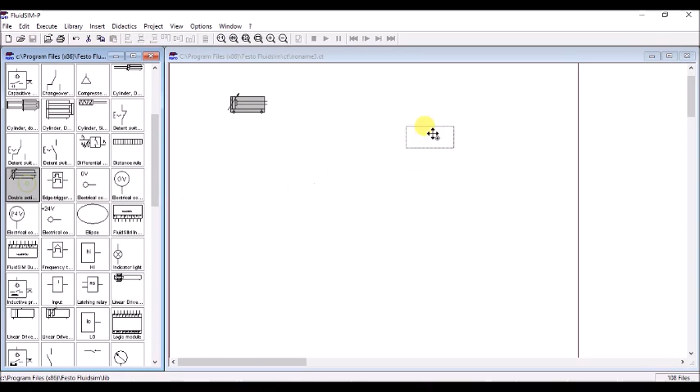For actuating I'll be using 5x2 valves, and here I'll be taking the help of double acting cylinders. I'll be taking two double acting cylinders. Let me take this as A and this as B, and for this I'll be naming it as A and B. For that I'll be requiring the text, and the sequence what I'm using is A plus, B plus, A minus and B minus.

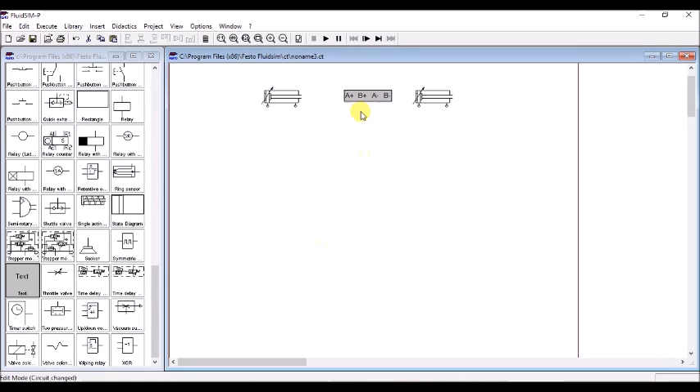This all with the help of electropneumatics. When I say electropneumatics, obviously I'll be having the instruments or else the equipments used as relay, limit switch and make switch, break switch and so on and so forth.

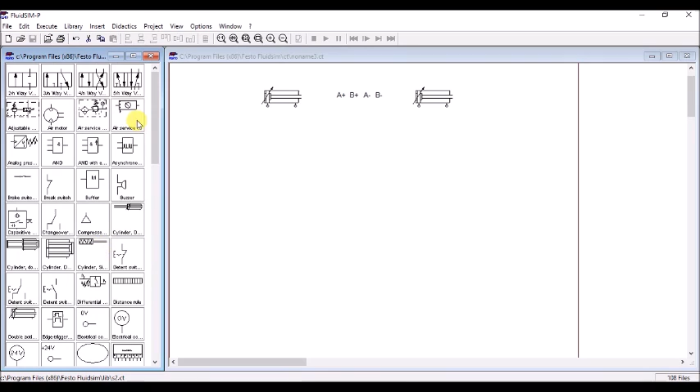And for this I'll be going for 5x2 direction control valve. One I'll be attaching here. Let me zoom a little bit. Yeah, I guess this is comfortable. Here, one here. 5x2 direction control valve, and this would be attached here. This would get attached here.

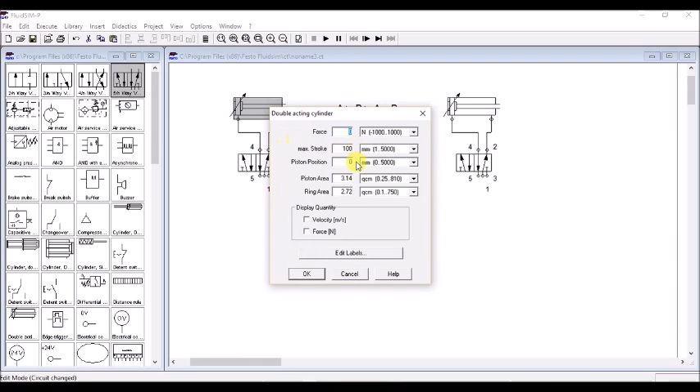A and B. As you know, I'll be just naming it as S1 0, S2 100, and same thing here, name it S3 as 0, S4 as 100, right? After that, as I said, this is electropneumatics.

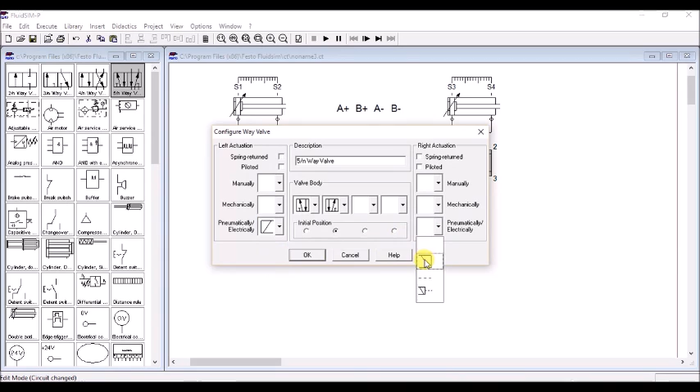This actuation will be not pneumatic, but it would be electrical, wherein these are called as solenoids. The symbol for this is a symbol for a solenoid, wherein this is being used for actuation of the DCVs, which are direction control valves. And let me name it as Y1,

this as Y2. Sometimes you may be expected to show the same on papers in your exams, so then also you can refer to this software so that you can analyze yourself whether you are doing it correct or not. So what I'll be needing is a compressor and a sucker also.

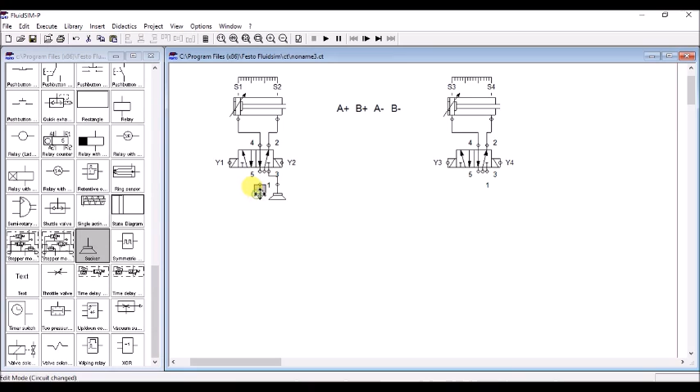Sucker would be here and compressor would be here, and again the same set will be present for this also. Yes, now what I'll do, I'll not zoom it now. Now I require a 24 volt supply and a 0 volt supply, wherein we are working on the electropneumatic circuits. 24 would be here, 0 would be here.

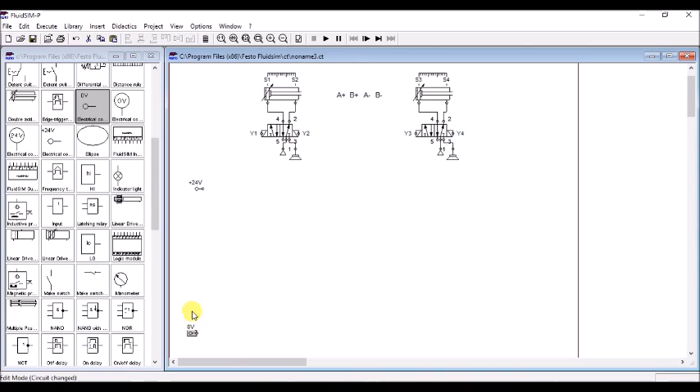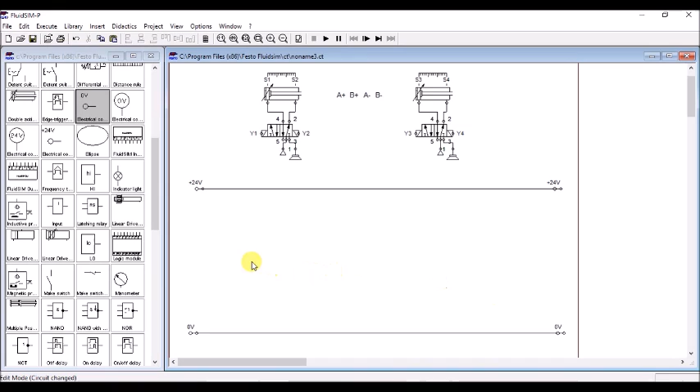But for my reference, what I'm doing is I'm just taking 24 here and 0 here. Afterwards I'll just remove it, because to draw a line I require this, nothing else. Then again I'll just join this like this. Okay, afterwards I'll be just removing it, or else I'll just remove it. I can remove it now also, yeah, afterwards also. Yeah, let us try to do this with the help of electropneumatics.

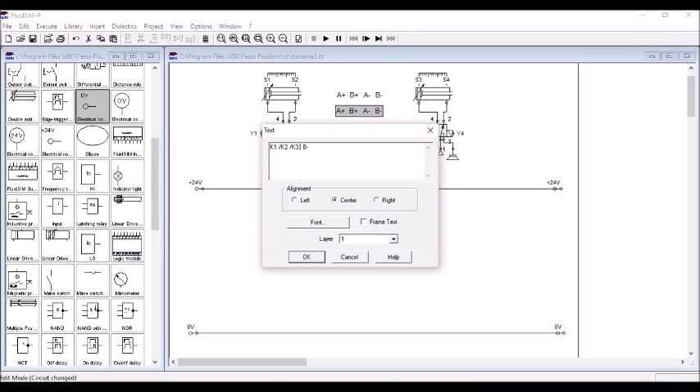Kindly make sure that for A plus I'll be using, I'm just writing here, K1. With the help of K1 relay I'll be achieving A plus. With the help of K2 relay I'll be achieving B plus. Then with the help of K3 I'll achieve A minus, and with the help of K4 I'll achieve B minus. Okay, this is for your reference, right? Let us start the same.

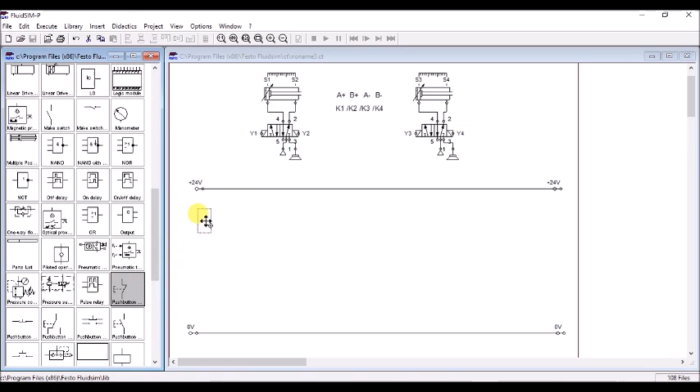Now what I'll do is I'll use the push button to start anything. Push button you can get from here. Here I have a push button, right? So I'll be using this push button over here. Yes, I have taken the switch button over here, or else a push button. Then what else I want? I want a limit switch, or else I could say make switch. I can convert it back to the limit switch.

I'll just double click this one, and there are three options over here. You can select a switch with roll, then it would be acting as a mechanical roll. What I said in the earlier videos, that whenever we are going for A plus B plus A minus B minus kind of circuits, the last position of each cylinder should be depicted in your diagram, or else the last position would be there in the first diagram of the circuit.

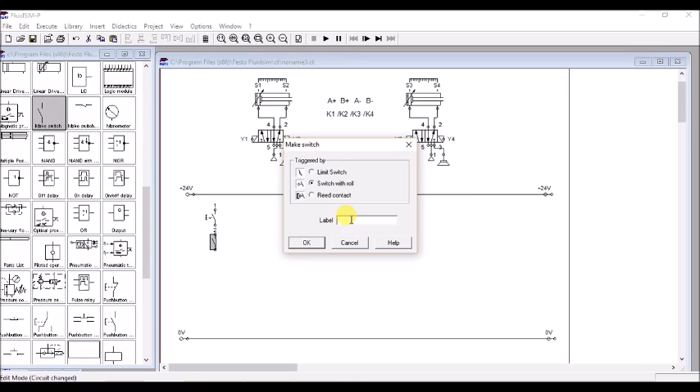So here I have B minus, which means after attaining B minus, or else the position S3, I can proceed for the next cycle. So here what I'll do, I'll say S3. So I can see S3. I'll just attach this also. I'll attach here also, right?

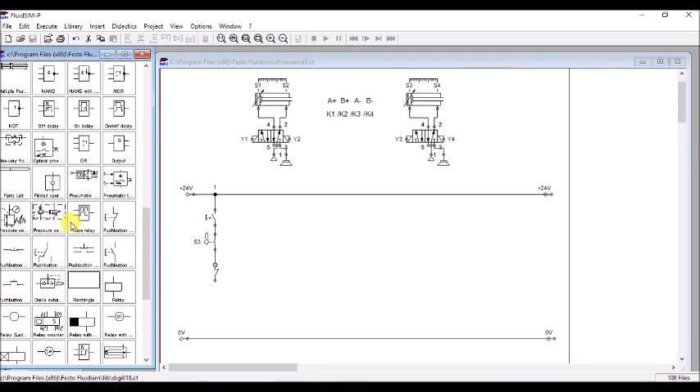After that, what I need is a break switch. Break switch is nothing but a normally closed switch, or else a break switch it is called as, and a relay. I want a relay.

Yes, for this I'll name it as K2, and I'll be requiring another make switch. From here let me take a make switch. I'll just use it here.

Kindly please keep in mind that this system is called latching. I'll explain once the whole circuit is built with animation. I'll explain why this latching is required. This is very important. We'll be naming it as K1, and again for this relay I'll name it as K1.

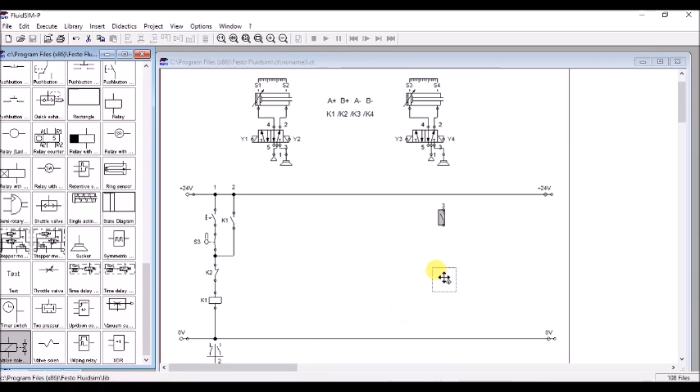Logic is very simple. Once this is made, half is my input, half is my output, like that I have made. So let me keep here a relay and a valve solenoid. Solenoid is that instrument or equipment in mechatronics which, if I'm naming it as Y1, would actuate this Y1 solenoid, right? Very simple. You can refer to my earlier videos. I have explained thoroughly what valve solenoids are.

I'll be naming it as K1, and I'll name this one as my Y1. So you can refer to a point that if K1 is true, that means this circuit is closed, Y1 would be actuated, wherein Y1 stands for A plus. Making sense? So like this, I'll just make a copy paste of it. In the book you have to write it again. There is no shortcut for that.

I'll just copy it and I'll paste it here, and let me keep it here, right? I'll attach this over here. Meanwhile, let me write this as K2. But kindly make sure, if K2 is present, K2 will give achievement in terms of B plus. B plus would be achieved when Y3 is present. So I'll just name this one as Y3. If K2 relay is made on, then my B plus should happen, right? Like that.

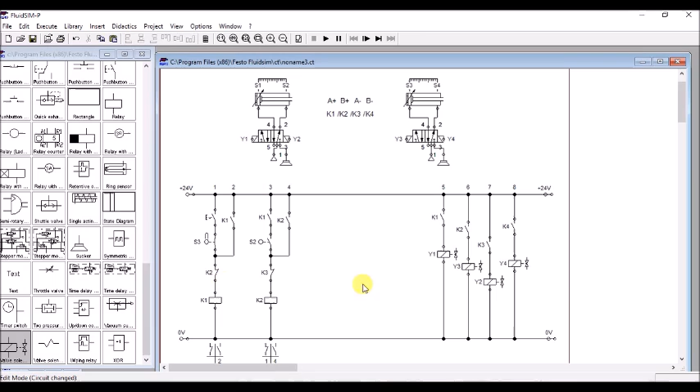So once the K1 relay is actuated, this K1 gets closed. Meanwhile this goes up, so the power supply comes from here to here because it's a push button switch, right? Meanwhile this is also closed, there is a power supply from here to here, but there is no power supply here because here I am changing this one to S2, right? Once K1 is closed, this is also closed. Once this is closed, power supply goes to Y1.

Y1 actuates, so obviously A plus will happen. A plus is true, then the S1 position has moved to S2, which means S2 becomes true. After that, as K1 is power supplied, power supply goes in here. So K2 actuates. Meantime, when K2 is actuated, we have a normally closed switch here. So, as the relay toggles the switches, this becomes a normally open switch.

So for this one, power supply goes off and only power will be present in this one. Meanwhile, power supply goes off for this and power supply would be present for only this. So every line, this line makes this off and moves further. That's why this relay is important to toggle this normally closed switch.

This is called latching, wherein power supply, once K1 is not true, obviously power supply would get cut. But as I have K2, this becomes normally closed and power supply would be parallelly coming from here to here. Making sense? Yes, we'll go a little bit further.

I'll take the help of copy and paste again. Now what's the scenario? I require this to be K3, right? This should be K2. This should be K3. This should be K4. And this one will be K3, right?

So what happens here? K1 has achieved S2, or else A plus. K2 has achieved B plus, that is S4. If S2 is true, meaning A plus has happened, then K2 will happen, meaning B plus happens. If B plus has happened, A minus should go.

For that, I'll be requiring here S4, which says if S4 is true, then only I can go for A minus. So if K3 is true, Y2 happens. Y2 stands for A minus, right?

Again, meanwhile, I'll move a little further. Yeah, last step would be: we have achieved A plus, B plus, A minus, and now I'll be going for B minus. B minus would be achieved with the help of K4.

So here I'll write what? K4, I'll write. Okay, and here I'll be writing K3, and here if A minus is being achieved, that means S1 is true, then only it can proceed further. And here I'll make it as K1, which means

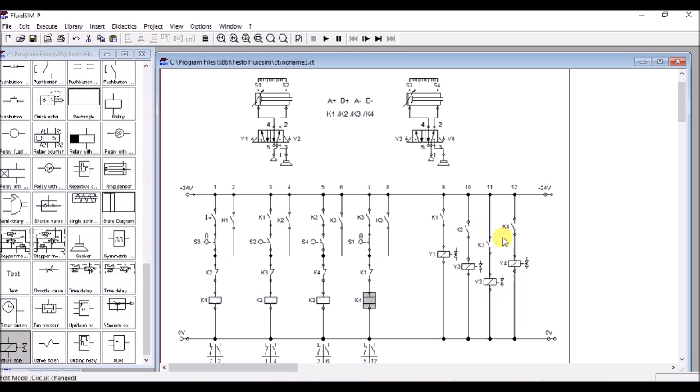while the first relay is on, the last should be off, or else if K1 is toggled, this becomes normally open, wherein the last circuit becomes off, like that, right? And what next? If K4 is on, Y4 will happen, right?

So we'll try to animate the same. We can write K1, or else if you don't write anything over here, if you just leave it blank, then also it will work, right? We'll try to see both the things. Now what I'll do, I'll just remove this, and I'll remove this also, right? Let us try to animate the same.

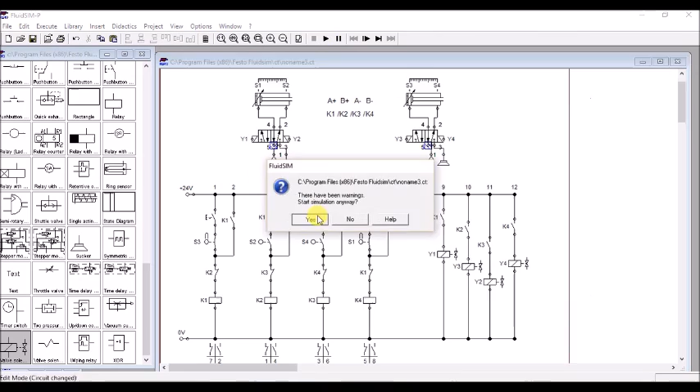Okay, I'll just press it: A plus, B plus, A minus, B minus, right? It would be acting as a continuous cycle. For you people to understand, I'll be going stepwise. Kindly have attention. Now I am pressing this one, pressed.

In the next segment, you can see the red line as power supply here also and even here also. Can you see? Power has been latched. It has started coming down from here. Once K1 is on, K1 is being closed, right?

This K1 was normally closed as we have done in the paper earlier, but now it has become normally open, right? So that last segment has been cut off and rest all being cut off. Only one segment is on. Due to Y1, this position has changed and air can move from here to here.

So what happened? Now it has achieved A plus. Once A plus is being achieved, S2 has become true. Meanwhile, what happens? K2 toggles this and this becomes normally open.

So again latching happens and K1 gets open now. See, it became open, K2 closed, Y3 made on and proceeded for B plus. Once B plus is true, that is S4 is true, again latching happens. It proceeds, B plus happens, after that A minus happens, after A minus S1 becomes true, this becomes the circuit

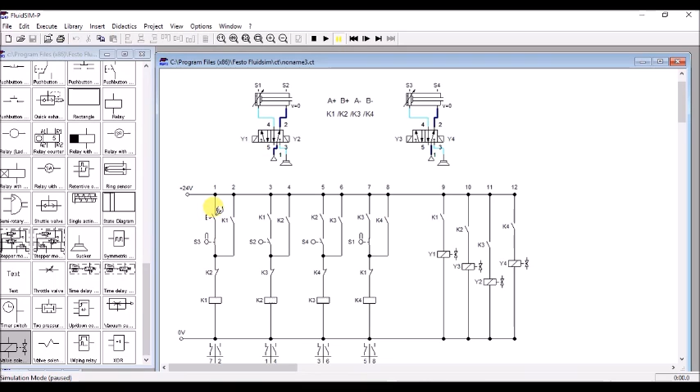Pressed, right? Even you can go for direct animations also, but I'll be just going for single step for your better understanding. That's it.

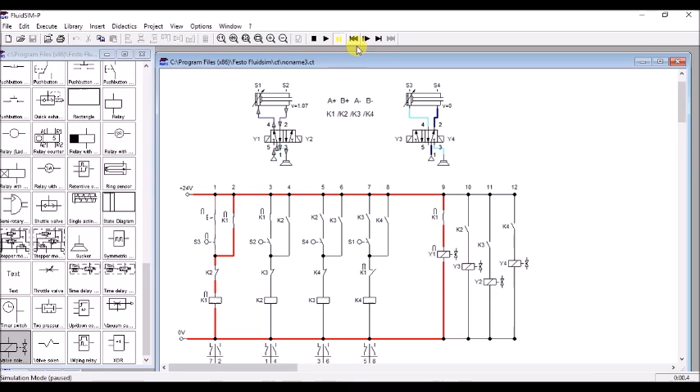Okay guys, hope this was helpful to you. In our next videos, we'll be going for some more circuits wherein A plus, B minus, A minus are being asked